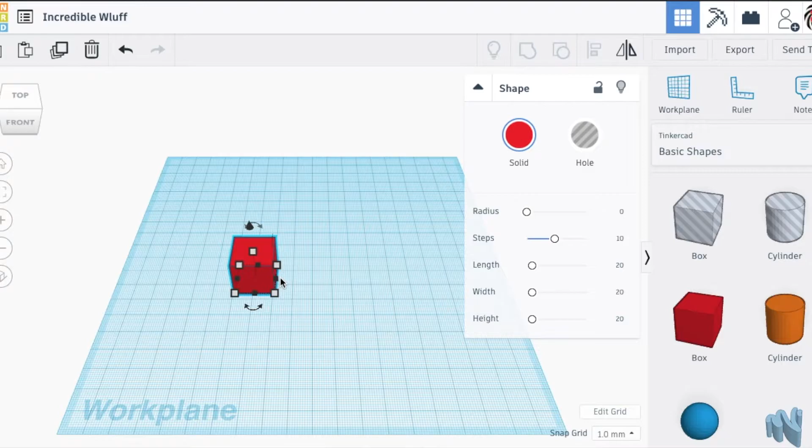Here we are once again in Tinkercad 3D design software. I am looking to make a similar design to the one I made in my previous video, the bracket to hold on the surge protector under my desk.

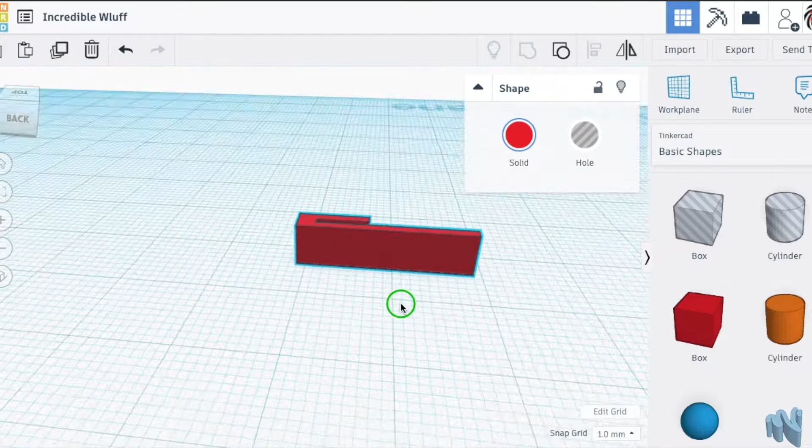Now, the one thing I learned from that project is I want to avoid the droopy, saggy aspect that happened with the surge protector. So after doing some research, I realized that it's just the bar in the front. I didn't extend it down quite far enough in front of it.

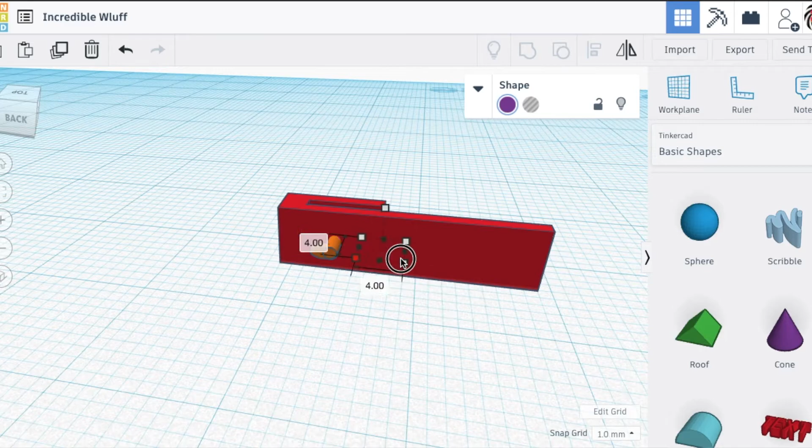The clip itself, I want to make sure that's plenty strong. It's not a lot of weight that I'm adding to the little hook here, but I do want to make sure that it's got plenty of support, so I am going to reinforce the connection between the peg and the brace itself with a little bit of a pyramid shape to give it some added girth here at what I might perceive as the weakest point.

Even in combination with that, I'll make sure that the downward side, the side underneath the clip itself, will actually have the most support with the biggest bracing section under it.

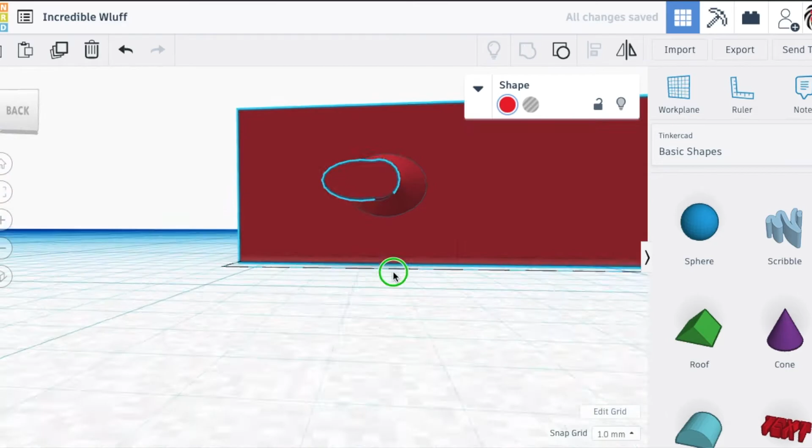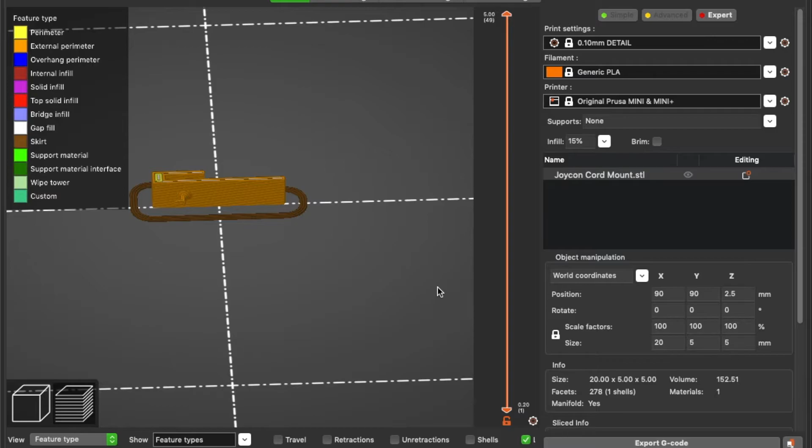When I transferred this file to my slicing software, I couldn't necessarily find my calipers, so I'm doing a bit of guessing and printing. So in just 7 minutes, I should have an example to definitely judge from and move on from there.

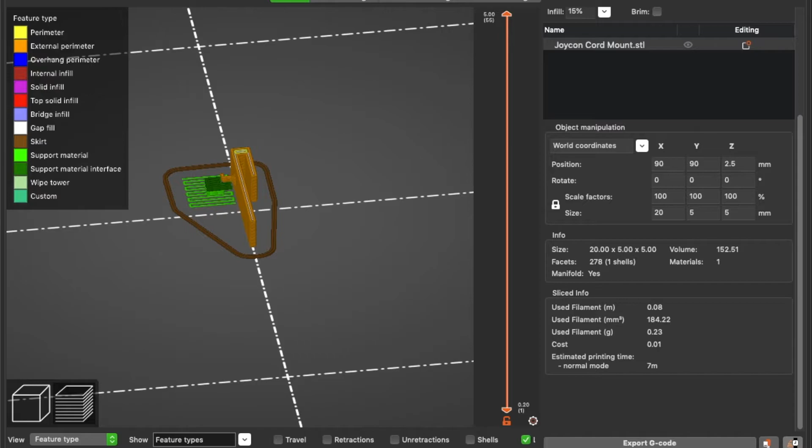After printing it, it's definitely going to be too short and too small. So I'm going to guess 2.5 times bigger. So that would be 100 and, we'll say 75%. And even more so, after some terrible math, I've realized 250% is more like what I'm looking for.

All right, and after about 20 minutes, I now am faced with this. It's tiny, it's a bit tinier than I pictured it in my head as I created it, but, well, I guess it's the moment of truth. So I hope I could just slide it right in here and twist down, and it sits just like that.

Very small. The little hook should be able to cinch up the lanyard like this, make it a little easier to hook on there. Perfect. Excellent. So now, next time I'm looking to find the attachment for my controller, move the lid out of the way and just find the strap right away.

I anticipated needing to print an even bigger version, but as I mentioned and corrected earlier, this is printed at 250%, so it should have been a little too tight, but I think it might actually be perfect. So that is certainly a success.